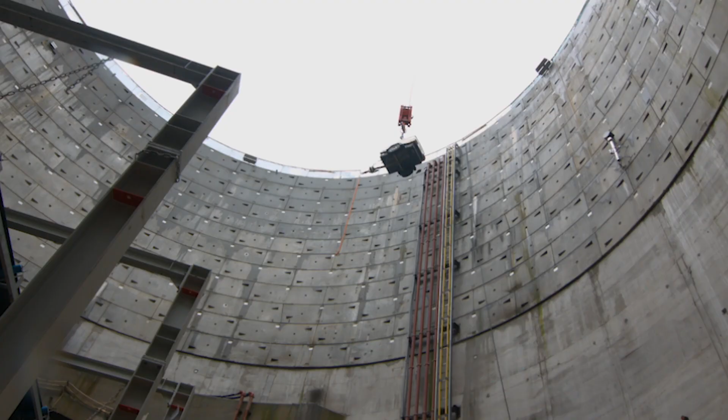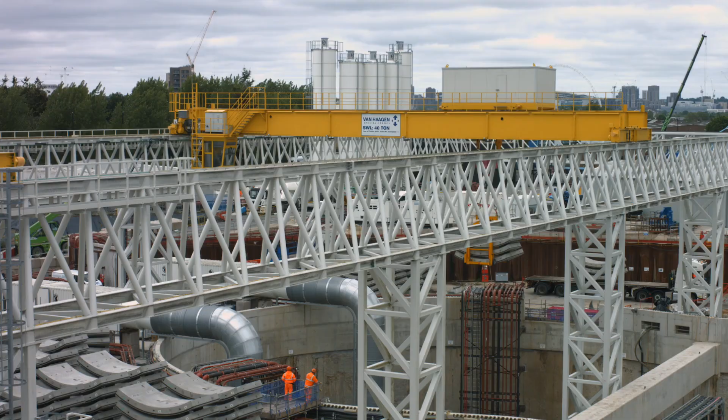It is not a new concept to avoid putting yourself in harm's way. Despite this, it is not uncommon for people involved in lifting operations to inadvertently put themselves in positions where, if something were to go wrong, they could be seriously injured. If something starts to go wrong during a lift, people often act instinctively and physically intervene in an attempt to resolve the issue, rather than stopping the lift from a place of safety.

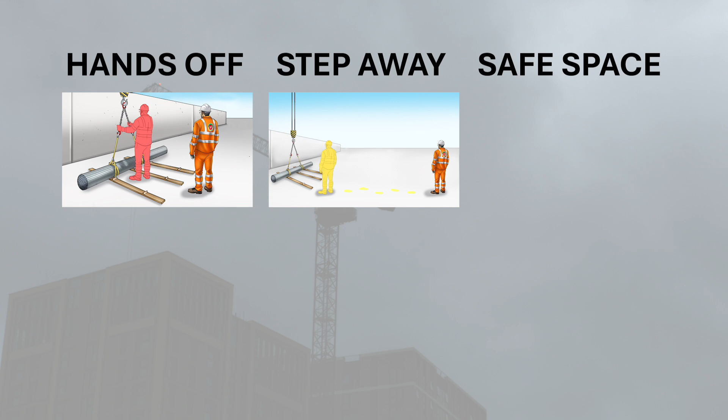This short production outlines the principles of hands-off, step away, safe space, which is about lifting personnel assessing their surroundings, identifying the hazards that are present, and whenever reasonably practicable, taking their hands off the load and moving to a safe space before loads are lifted.

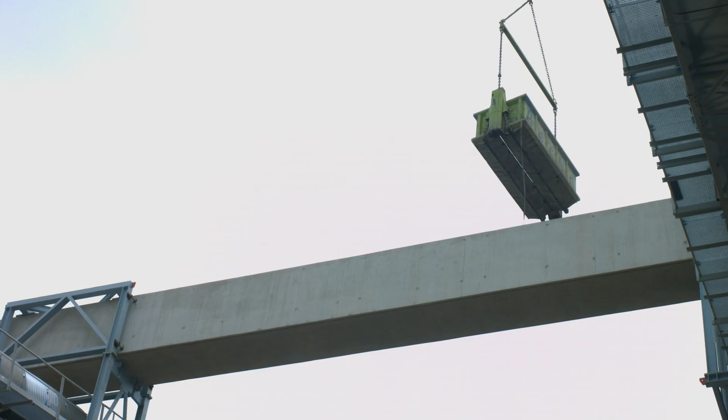Sadly, there's been a lot of injuries in relation to people's interaction with loads, being in direct contact or close proximity to loads when they're being lifted. Many of those have been hand injuries, which are bad enough in themselves, but sadly there have been some fatal injuries as well of people being too close to the load. So we're going to look at some of these examples being put into practice.

So we're here and there's a lifting operations briefing taking place. Where would be the best place for the briefings to take place? Well, that depends on the circumstances, but some of it would be worthwhile carrying out indoors, out of the weather, and you can get the full concentration of the team, and you can cover some of the theory elements, some of the principles of the lifting operation. But a lot of the briefing, it would be really helpful to carry that outside, actually near the point of works, because then you could point out the loads to be lifted, how they're to be slung, the equipment that's been used, and things such as where the load's going from and to.

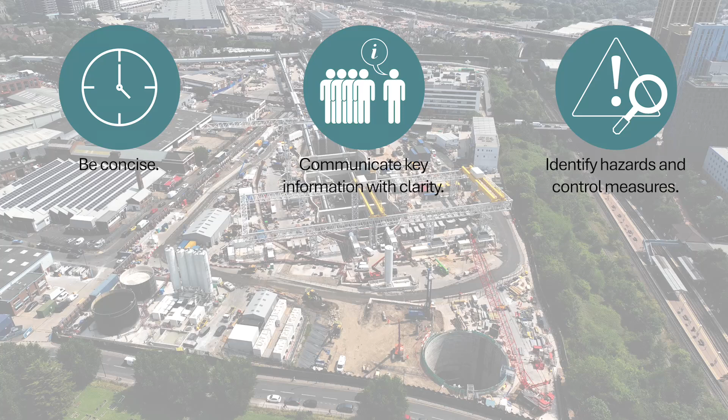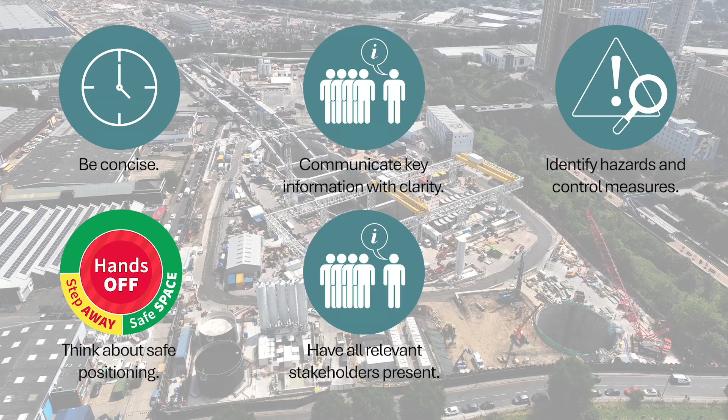Great information. Briefings should be concise to ensure the key information in relation to the lift is communicated with clarity. The significant hazards that remain must be identified and the required control measures detailed. This will also start the process for the lifting team to consider where it will be safe to be positioned during the lift. All lifting personnel must be involved in the briefing. It is an opportunity to confirm that the lifting team understand what was briefed and for them to ask any questions they may have.

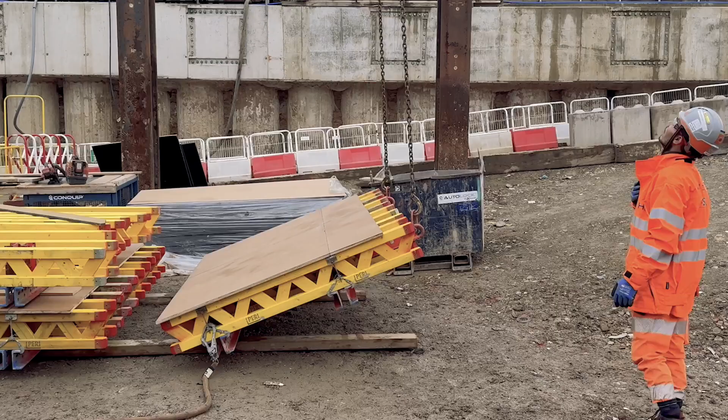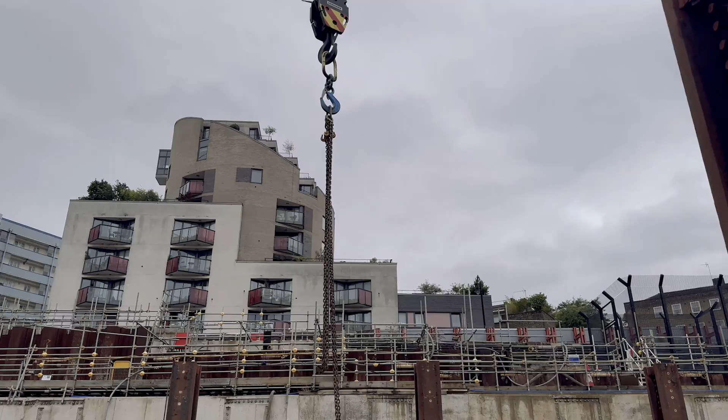We're lifting a formwork shutter panel, so this gets used for pouring concrete and shaping concrete. And really what the guys are looking at here is making sure that boom head stays as close as possible to directly above the position on the load, and that way they maintain control of the load. The risk we've got here, of course, is as that load is being picked up, it could move, and it's very difficult sometimes to ensure that you've got the jib head exactly in the right spot to avoid any movement of the load. So what the guys have done now is they've come a little bit clear, and at least if the load does move, then it's very unlikely to strike them.

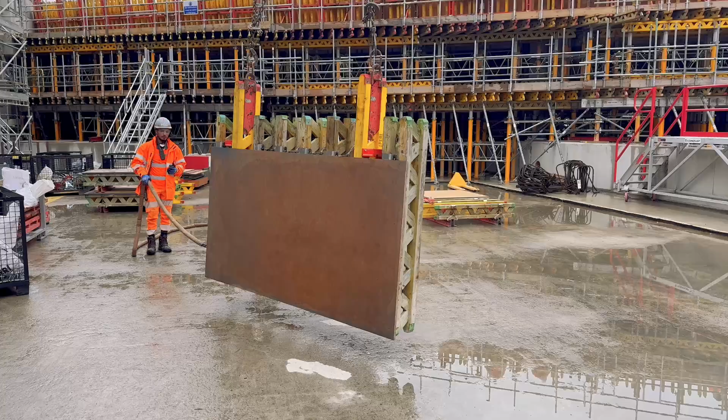A lot of people feel that they have to be in close proximity to the load and sometimes even holding the load, whereas there are many situations that you don't really need to be in contact with the load, and it does give that little bit of safe space. They can clearly see what the load is doing in this case, they can direct the crane easily, but they're not so close that if the load moves, it's going to strike them. Rotation of the load might be required as part of the lift.

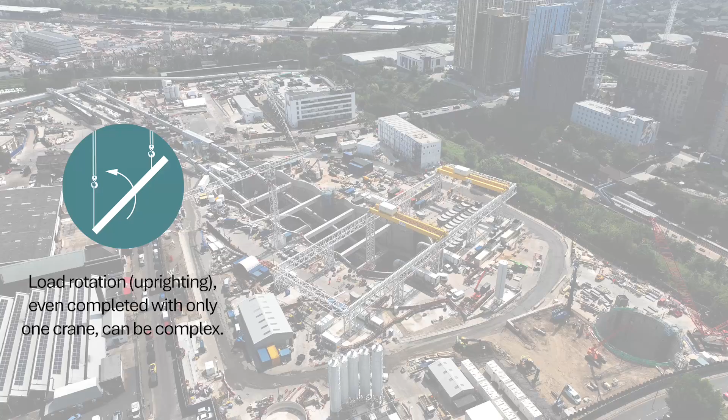Where necessary, this is done with 2 cranes, but often it can be achieved with 1 crane only. Formwork is a good example of this, where the load is prepared horizontally but then stood up by one crane only. This rotation of the load can lead to unexpected load movement if not undertaken with care, or if the crane is not directed to move with the load to keep the hoist rope, lifting accessories and attachment points on

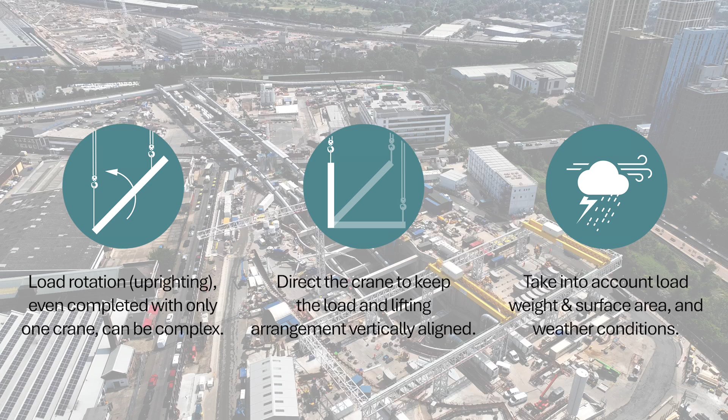the load vertically aligned. Loads which have a relatively high surface area and a relatively low weight, such as formwork, are also more likely to be affected by the wind. This may cause the load to rotate or sway as it catches the wind.

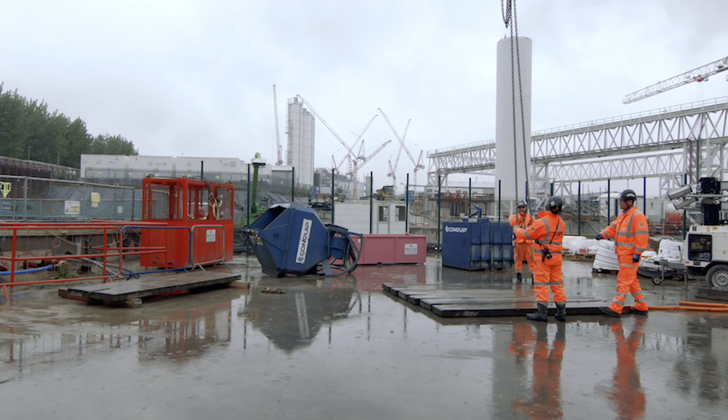So I believe that we're lifting some Eki mats this time, Kevin, is that correct? Yeah. And what they're going to be doing here now is they're going to be stacking the mats on top of each other. The real risk there is you've now got definitely a crush risk for fingers. So it's really important that they have their hands in a suitable position when they're landing the mats on top of each other to avoid any serious hand injuries of those mats coming down on fingers or fingers being trapped by the chain or whatever.

Yeah. In a situation where the load was doing something that you didn't want it to do, it's just amazing that there's that instinct that sometimes kicks in for people to grab the load. I think being that kind of couple of metres away from the load, it just gives that time that rather than going back to put your hands on the load and grabbing the load if it's doing something you don't want it to do, you may stop the crane or just think of alternative action.

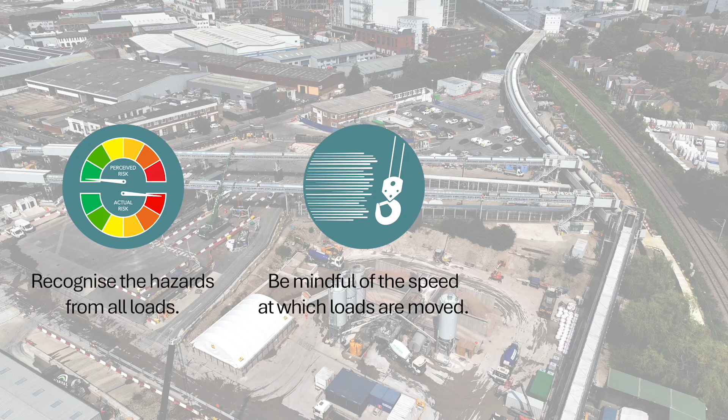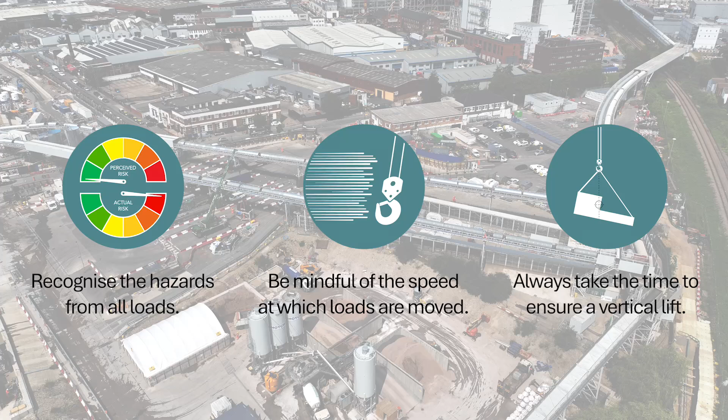Simple loads which are moved routinely are often perceived to be low risk. Because of this, they are often moved at pace, which may catch out lifting personnel. If loads are close together and fairly light, there may be insufficient attention given to aligning the hook over the centre of gravity before each lift starts. Loads which were perceived to be low risk can therefore still present hazards from unexpected movement.

So we're now landing the concrete skip. Yeah, it's going to get landed behind the concrete vehicle here just to get refilled, ready for the next pour. And he's going to use the marker here to help him with positioning the skip to get it in that right position, the ideal position for refilling it.

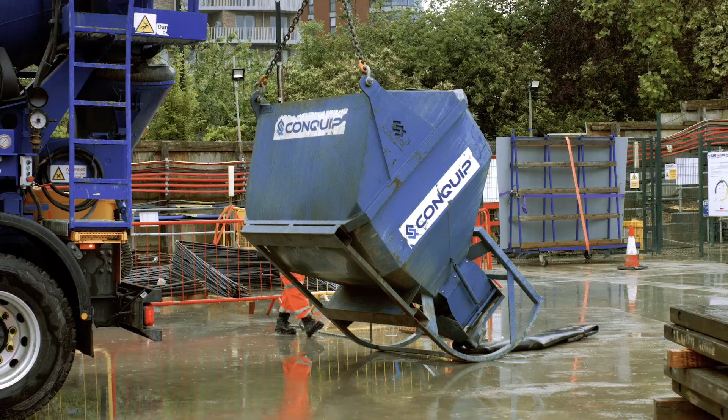This is a key point now where, as the skip's rolling over, you're not getting yourself in any bad position to end up being crushed or struck by that skip as it lays over. Watch the slinger signaller off to one side, clearly out the way of the skip, still directing the crane, got good clear view. So yeah, works well.

Yeah. Really here, the main thing is trying to get the boom head directly above the position of the skip, you know, when it gets to that vertical point, so you can bring it up vertically with minimising the load swing. Well, there was a little bit of movement there, but that was nice. There's plenty of space, the slinger signaller's in a safe position, and that's the skip off, ready to go and get discharged into perhaps a formwork shutter. Yeah.

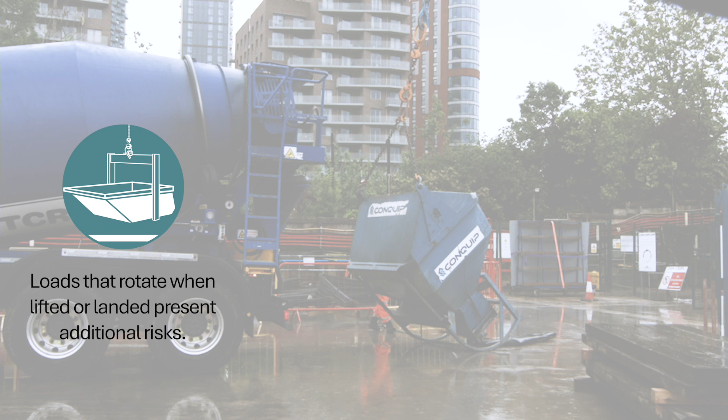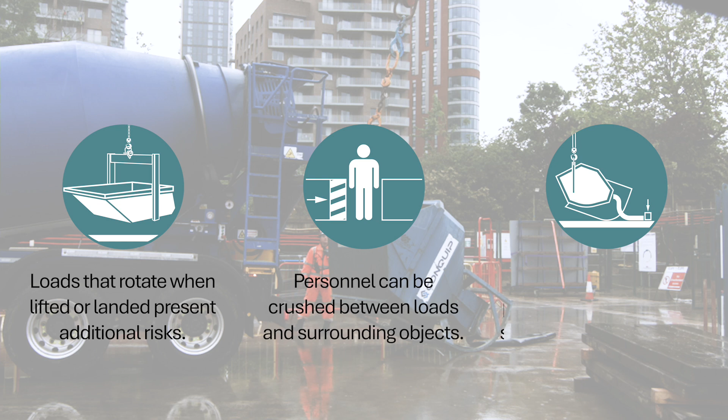Some loads are specifically designed to rotate when they are lifted or landed. If personnel are stood away from the load during this rotation, then it presents minimal risk to them. But conversely, if they are stood close to the load, they are at risk from the load striking them or from being crushed against any static objects. To assist in positioning loads such as these, it can be helpful to use positioning markers so that personnel can remain in a safe space away from the load.

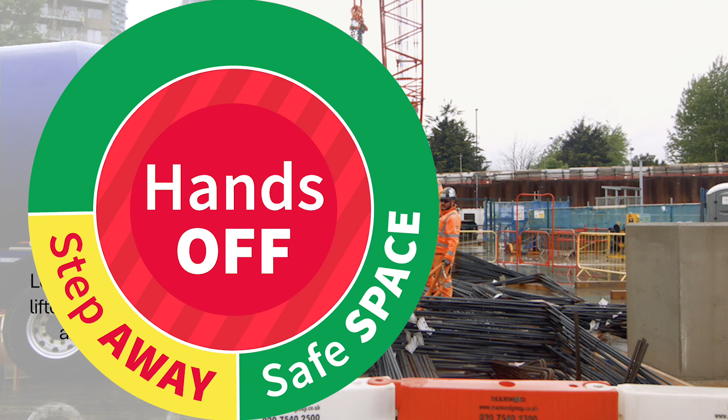So we're doing a trial lift here, is that right, Kevin? He's taking the load up just to a reasonable height off the ground, just around about waist height. So it's a position that you can check the load fully, but it's not too high. I like to call it the 3 S's of trial lift, which is security, stability and slinging.

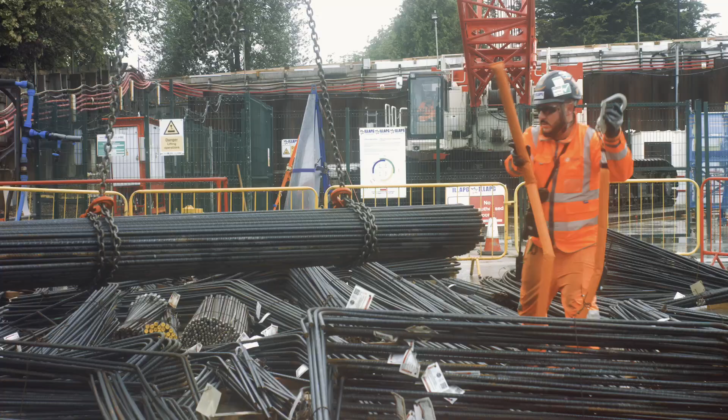You're checking that the load is completely secure and held by the accessories, the slinging arrangement. You're making sure it's stable, it's level, it's balanced, it's not going to come out of the slings. And you're also just having another check of the slinging to make sure things like slings aren't twisted, hooks are facing the way they're supposed to, shackles done up correctly, these kind of things. And of course, you would want to check every load that you pick up. You do a trial lift on every lift just to make sure that's safe to send off.

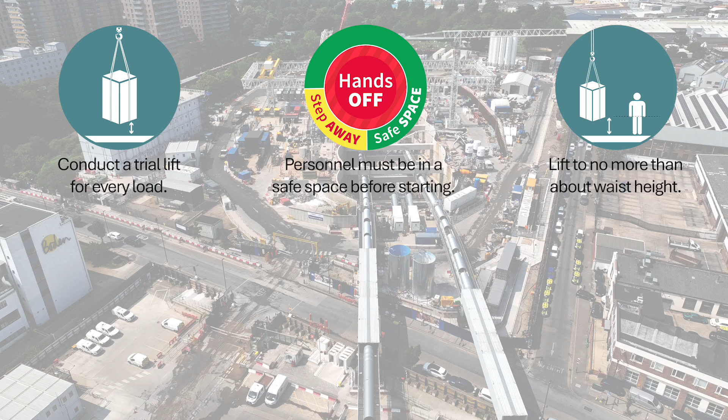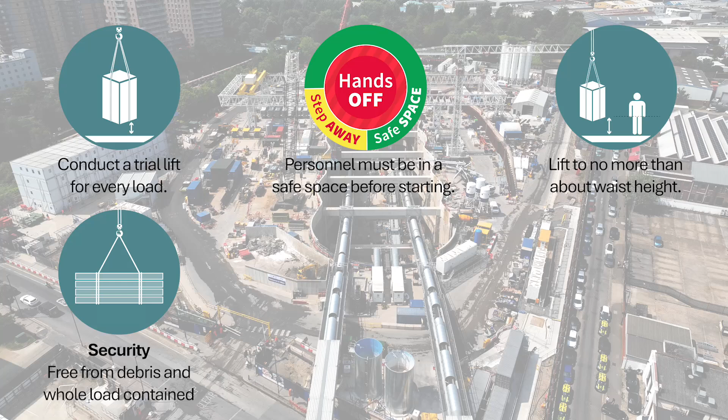A trial lift should be conducted for every load. Lifting personnel should be in a safe space away from the load before the trial lift starts. The trial lift should ideally be no more than waist height and will allow the lifting personnel to confirm 3 key things. Load security, that the load is free from debris and that the whole load is contained. Load stability, that the load is balanced and level. Slinging, that the accessories are correctly attached and being used at appropriate angles.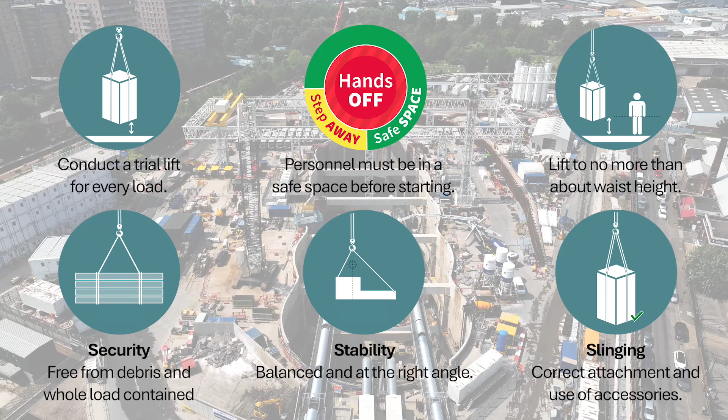If any issues are identified during the trial lift, the load must be returned to the ground and any necessary adjustments made before undertaking another trial lift.

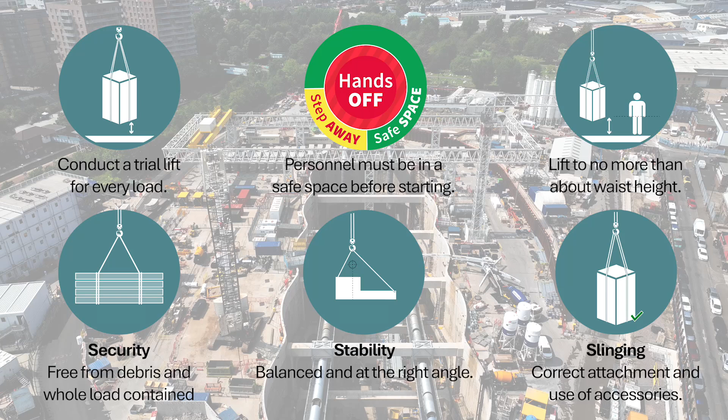One of the big things here then, Chris, is they've got to look at where they're ideally going to sling the load to get that to come up balanced. In this case, there's lots of rebar there, there's lots of different things around them, so that can be quite difficult. But it's thinking about where are we going with the load and how can I get myself in a position that if that load moves in an undesirable manner through load swing or wind or the boom head not being in the correct position, that actually I'm not going to be struck by it.

Their hands are off, we can see there's no risk of their hands being trapped on any part of the load or on the chain there, which is good. Yeah. They have taken a step away and they're about to commence the lift. So let's see what happens here. You can see there, picked the load up, it's reasonably level, maybe the one end caught on something. Yes. There was a bit of movement on the load there, and you can see that where they were standing, they weren't in any danger, which is a good thing. Because they'd already stepped back.

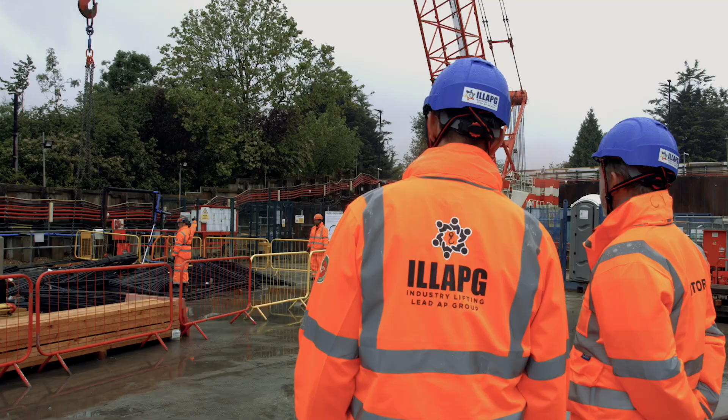The tagline is staying on the trailing end, so the load is always moving away from the tagline handler, and that's exactly what we want. We can see here as well, as the load comes up, it's vital getting that slinging position correct, so that the balance of the load is suitable.

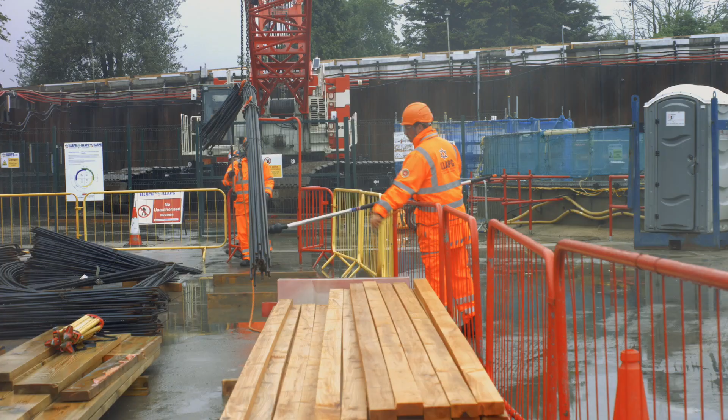Is this a push and pull stick he's got there, Kev? Yeah. What he'd done there was he used that to actually retrieve the tagline, so that he wasn't going beneath the load to get the tagline, and pulled the tagline out towards him so then he can hold the tagline. And good, he's using a push stick at the other end there just to stop the load from rotating and landing the load on these timbers.

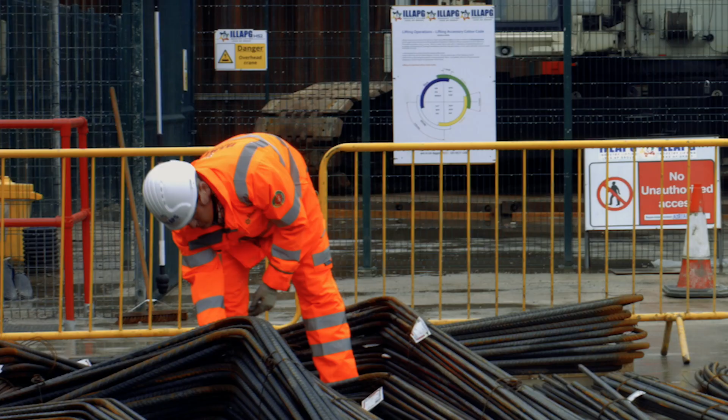And there are some points you can put your hands and it's not going to be problematic. But they didn't need to at all. That demonstrated there, in that case, there was just no need to put their hands on the load at all. Now, of course, in some situations, if it's necessary, you could hold the chain above the choke and make sure your hand isn't in any position that it could be snagged by the chain or anything like that. But they didn't need to there. It was a great demonstration of actually not having to touch the load, which is exactly what we're trying to achieve.

Looks like at the moment, there's the works manager, the supervisor and the slinger signaller in there. Who is it actually necessary to have within this restricted access zone at the moment? You'd never go in if there was no reason to be there. Yeah, well that's pretty good here because clearly, now that the works manager had pointed out which load had to be lifted, he wasn't really necessary for being in there. And you've got to be confident, even if it's someone who's a senior rank, to ask them to leave.

Of course, we're all human beings, Chris, so it's easy to make a mistake no matter what level you're at. Yeah. It's about being mature enough to ask people, whoever they may be, to leave the area if they don't need to be in there, and also for the works manager to be mature enough to go, oh yeah, fair one, I'm not supposed to be in here.

Bundled loads are likely to settle into the slings as they are lifted. If personnel were to have their hands in or on a load when this happened, there is a high risk of crush injuries. Loads can also snag on obstructions, particularly if they lift up slightly out of level, and this can lead to the load moving unexpectedly, potentially springing up, as well as moving within the bundle. If a load gets snagged, there is the potential to damage or break either the lifting accessories or the attachment points on the load.

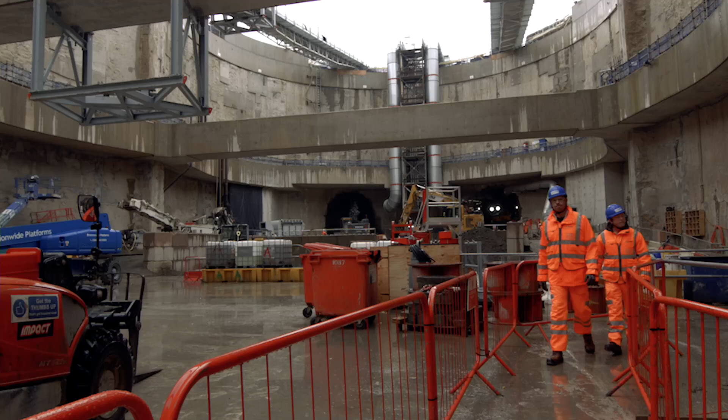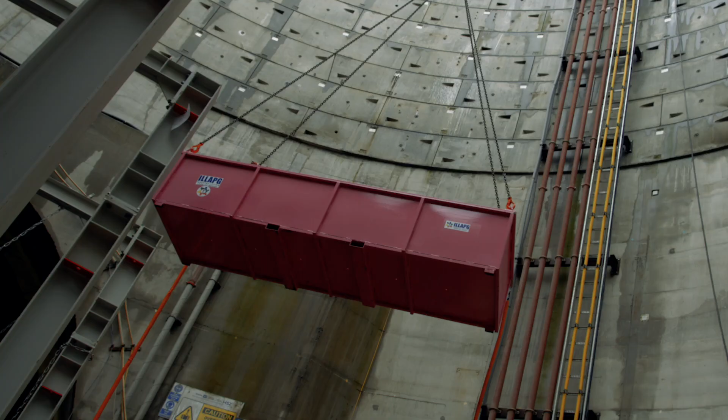You happy with the taglines here, Kevin? Yeah, so one of the guys there is going to reach out with the push-pull stick, grab the tagline, and then be able to take full control of the load. And of course, it depends on what the situation is to evaluate where the best place for the taglines is. If you've got two people on the taglines, it's actually best as it is where you've got the taglines on the same side of the load. That way, one can pull against the force of the other to make sure that nobody actually needs to go beneath the load.

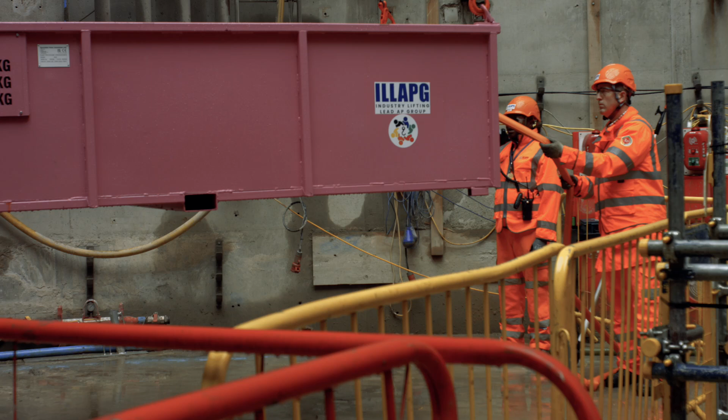The main thing here is the direction the load's going. So it's going into potentially quite a confined area here. And it's about thinking about where is the person in relation to that load. The signaller's in a good position, and you can see where the crush zone is now potentially being created as that load approaches one of those fixed objects. And the guys are clear of that crush zone, which is good.

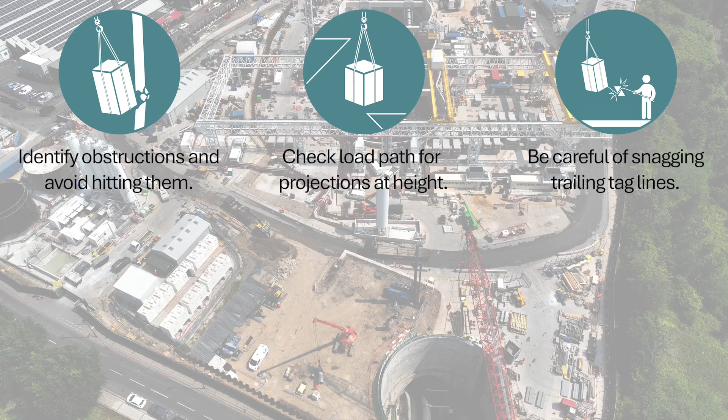When lifting into or out of locations with limited space, always be aware of the potential for part of the load, any lifting accessories, or a tagline to snag on any obstructions or projections in the space. There is also the very real risk of inadvertently placing yourself in potential crush zones, created between the load and static objects as the load is moved.

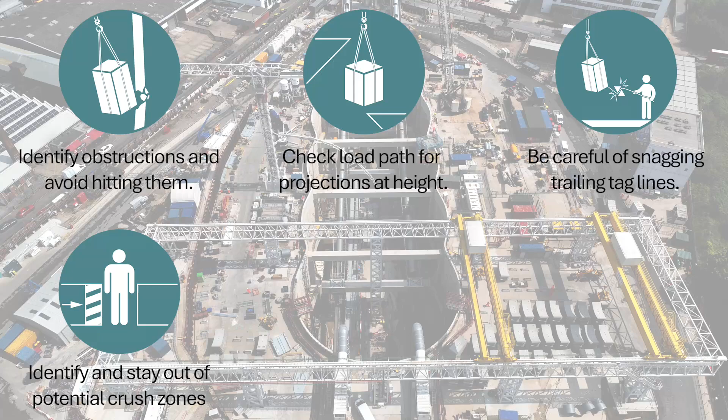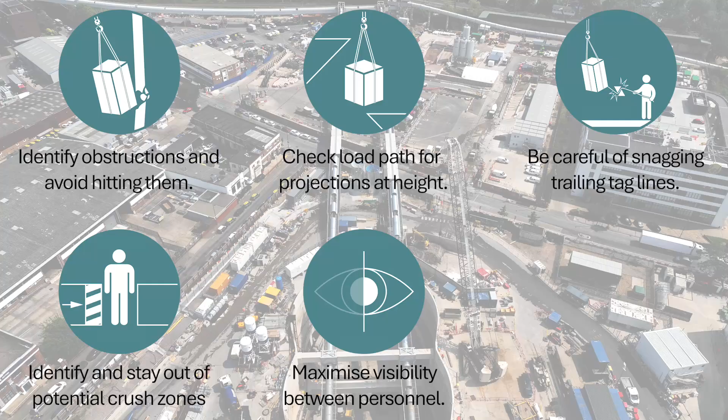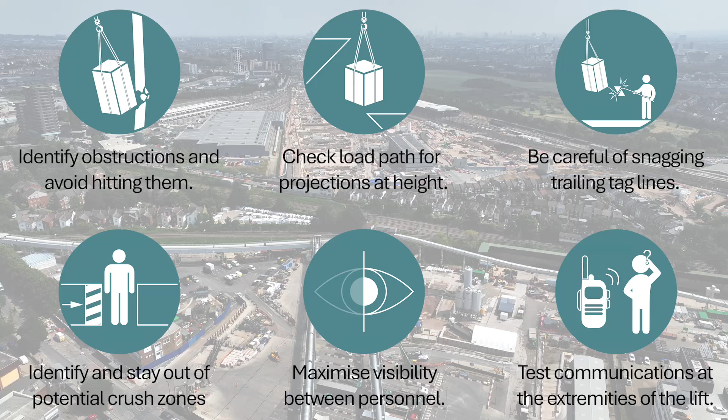In locations such as deep excavations and shafts, there is also the possibility of the lift being blind, where the operator and slinger signaller do not have a direct line of sight of each other. In these cases, which can also happen when lifting behind or to the top of structures, there is the potential for unexpected load movement, either as a result of communication failure or misunderstanding.

Well, Kevin, it's been a fascinating day for me, looking into your world. The clear message I'm hearing is the importance of communication, the three really important factors of HOSASS, and the importance of being brave enough to stop the crane. The hands off, step away, safe space, just stopping the crane if there's something undesirable happening.

Rather than looking at this as, oh, we're not going to have hands on the load. That's not what this is about. What this is about is really evaluating whether it's necessary to have hands on the load. Let's just make it so that hands are on the load through necessity rather than habit.

Great. Thanks, Kev. Be safe.

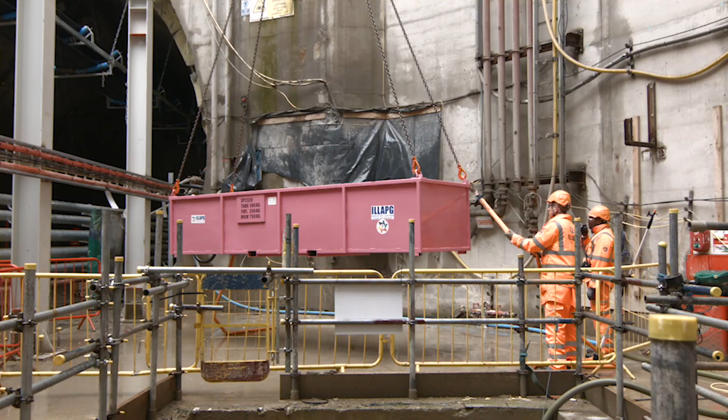During the course of this film, we've seen some examples of typical scenarios you will encounter during lifting operations on a construction project. We looked at some of the reasons why unexpected load movement may occur, and we discussed how this is most likely to occur at the start of a lift. There are, of course, more causes of unexpected load movement relevant to the environment you work in and the types of lifts you do. The key principle, however, is that lifting personnel must assess their surroundings before starting and undertaking a lift. Once the hazards present have been identified and assessed, lifting personnel are able to identify the safe spaces to be during the lift.

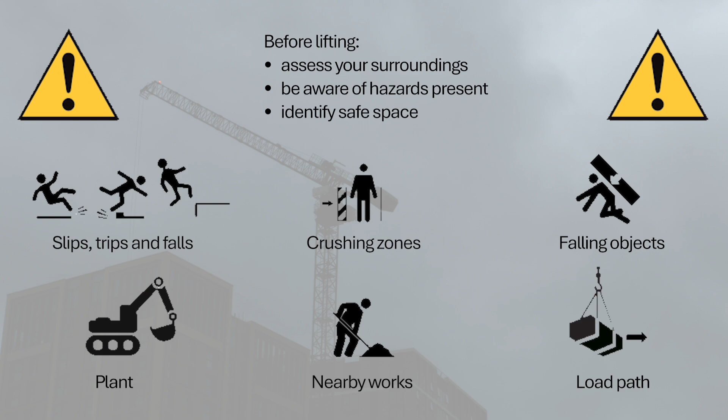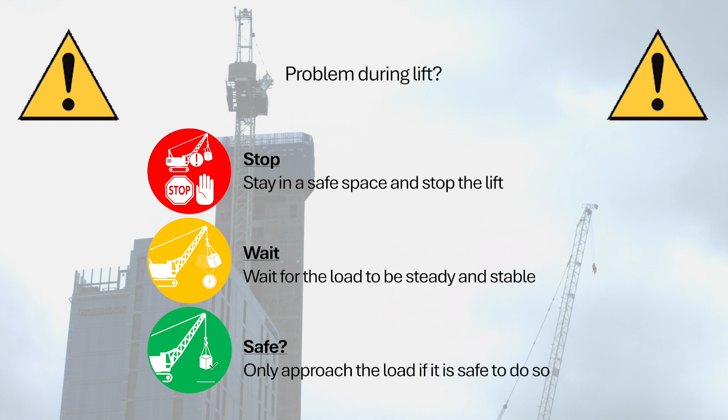Before picking up the load, personnel should take their hands off the load, step away, and move to a safe space. If there is a problem, the lift must be stopped. Personnel must not approach the load until it is steady, stable, and safe to do so. We hope you are able to use the principles shown in this film to raise the safety standards of the lifting operations you are involved in.